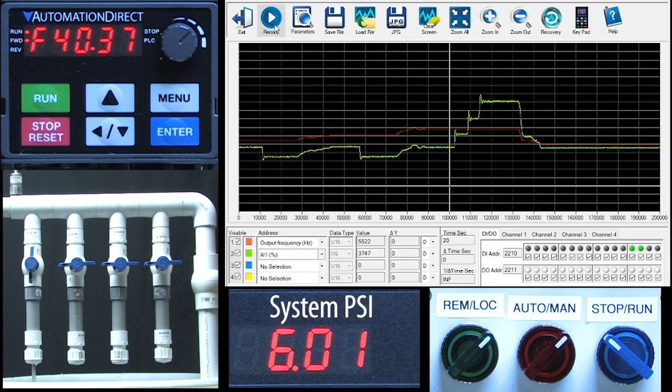In part 1, we saw that our system was capable of maintaining 6 psi regardless of how many valves we opened. All we had to do was keep adjusting the motor frequency to compensate for the pressure changes. In this video, we'll tell PID to do that for us. We put the PID setup in the remote configuration, so let's switch over to that mode.

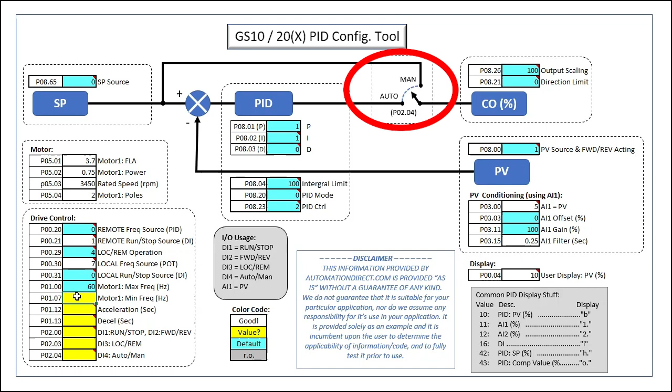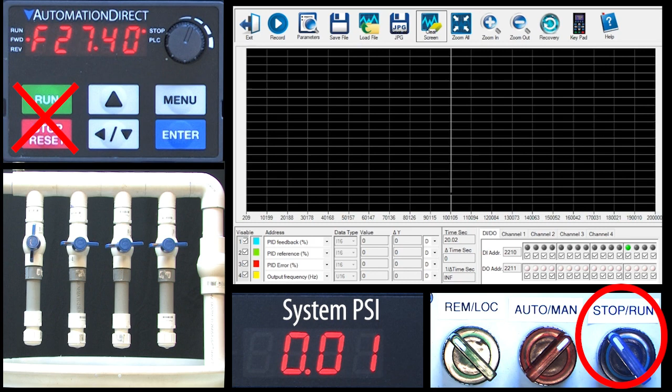Remember from our block diagram, when we're in PID mode, we can either manually control the drive's output, or we can have PID automatically control it for us. Let's start by manually controlling the motor's frequency. We set up remote mode's run-stop to be controlled by a switch, not the keypad like we did in local mode. So I'll flip that switch to run.

We set up the frequency in remote mode to be controlled by the keypad, not the potentiometer. So let's adjust that to get our system to 6 psi. And just like we saw in local mode, it takes about 40 Hz to do that. So everything we did in the previous video in local mode, we could have done using this manual bypass in remote mode, right? Well, yeah, and that's exactly what manual mode is for, so you can disable PID and test your system. Okay, but we want PID to automatically do that for us.

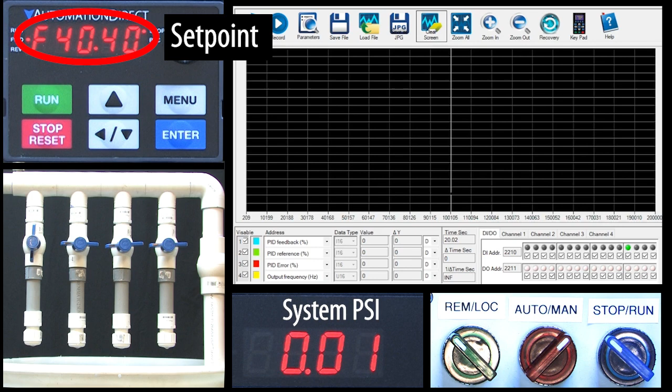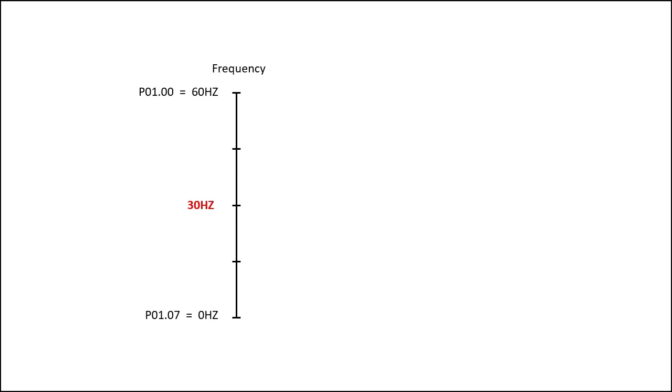But how do we tell PID we want to be at 6 psi? The GS20 understands frequency. It doesn't know anything about psi. Well, here's how that works. We told PID to use the frequency input as the set point. When we flip over to remote mode, PID no longer reads this as a frequency. It uses it as a percent scale. That is, it knows the frequency range we entered is 0 to 60 Hz, so if we enter 30 Hz, it reads that as 50% of full scale.

50% of our 15 psi sensor range is 7.5 psi, so in effect, PID interprets that 30 Hz as 7.5 psi. We want 6 psi, which is 40% of our 15 psi range. 40% of the 60 Hz frequency range is 24 Hz, so that's what we enter on the frequency scale to represent our 6 psi set point.

The GS20 does it this way because it keeps everything ubiquitous. It doesn't matter if you're measuring temperature or psi or what the full range is. You do everything exactly the same way because it's all in percent. Now you can see why I put 0 Hz in for the min frequency. If we had entered something else here, then it would be 40% of this range.

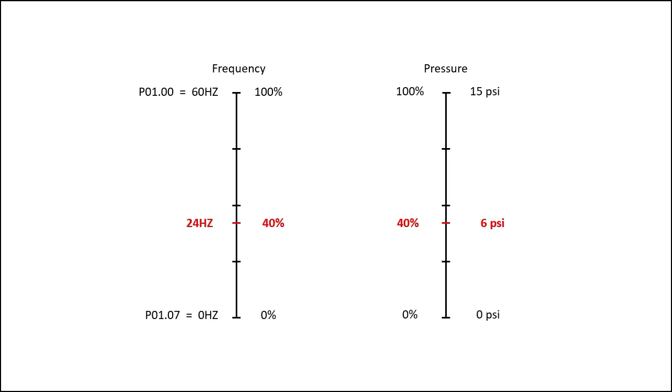Great. We're using the remote configuration, which is where we put PID. We want to automatically control the output frequency, and we specified a set point, which again is 40% of our frequency range, which tells PID to go to 40% of our sensor range, which for us would be 6 psi. I'll switch to run, and sure enough, PID automatically changes the motor frequency to get us to roughly 6 psi.

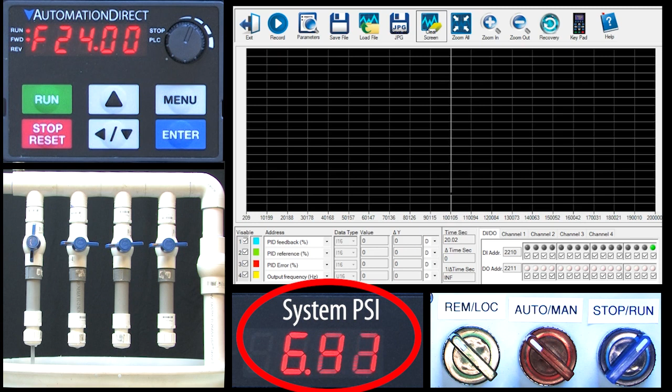Why aren't we exactly at 6 psi? Well, that's because our system isn't linear. The GS20 has a number of ways to correct for that, but for now, we'll just manually adjust our set point to whatever it needs to be to get the system pressure to 6 psi. It looks like it's around here.

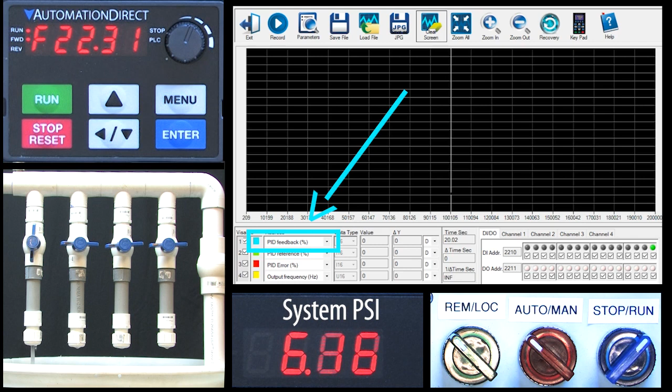I have this scope set up to show the process variable, or sensor value, in blue, the set point, where we want that process variable to be, in green, and the error signal in red. And we have the output frequency in yellow. Notice that everything's in percent except the actual output frequency, which is still in Hertz.

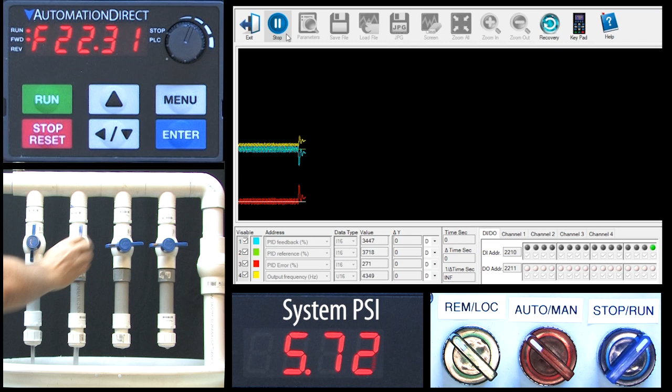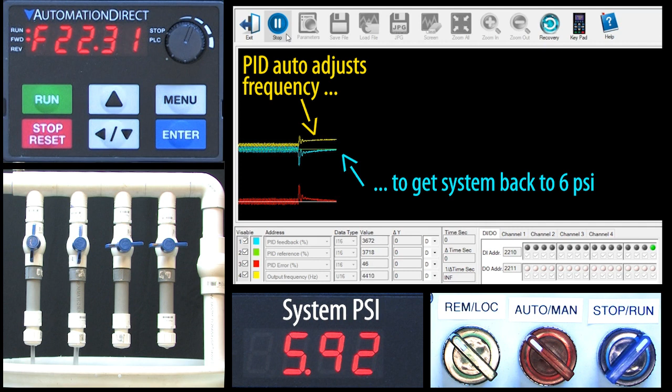I'll run the scope and open a valve, and look at that. The GS20 automatically adjusted the yellow drive frequency to get the blue system pressure back to the green 6 psi set point. I'll open another valve, and when the blue system pressure drops, PID sees that and automatically increases the motor frequency again to get that blue system pressure back to the green set point. Open the last valve, same thing. Perfect.

We can see the difference between the green set point and the blue process variable, which we call the error signal, down here in red. PID is always trying to get that difference, or error, to 0. It's doing a pretty good job.

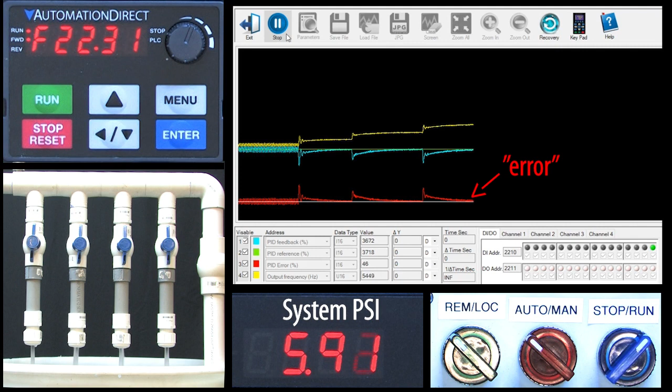What if I rapidly close 3 valves like we did in part 1? PID sees that and automatically lowers the frequency to get the system back to 6 psi. Exactly what we expect. Well, that's really cool, but it's taking around 5 seconds to do it. And while that's a lot faster and more accurate than when we did it manually ourselves in part 1, you have to wonder if PID can do better than that.

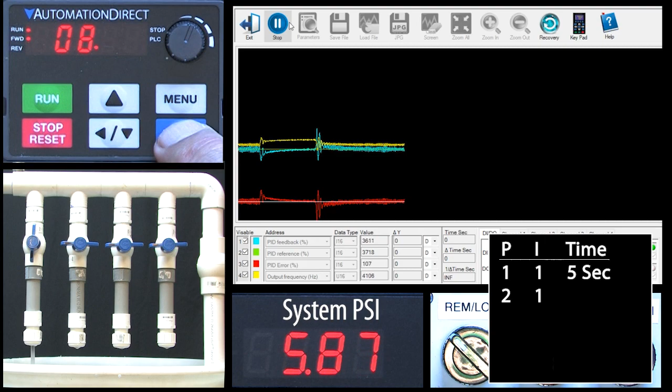I usually double P until things start to look unstable and then back off a notch. Let's try that. I'll start the scope, and I'll open a valve, and close it again just to get a baseline. Now let's go to parameter 8.01 and double P. Uh-oh, what's happening? Well, we've entered too much gain, and the noise in the system is causing things to oscillate. Let's change P back to 1.

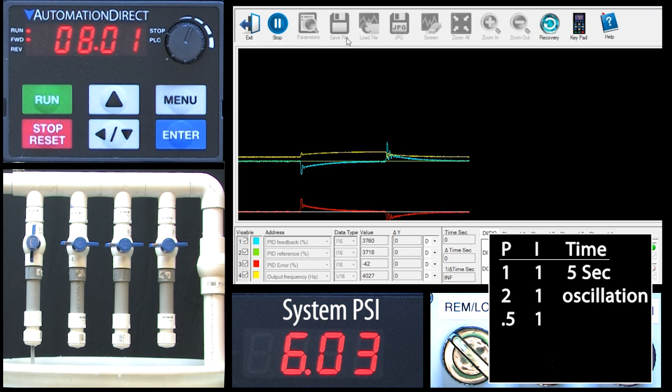That's better, but if I stop the scope and zoom in, we see the system really is still oscillating, which explains why this digital panel meter's display is jumping around so much. So let's cut P in half. That's looking better. The oscillations are about gone, and the digital panel meter reading is looking a lot more stable. But if I open and close a valve and stop the scope and measure that, the response time's gotten a lot longer because we reduced the gain.

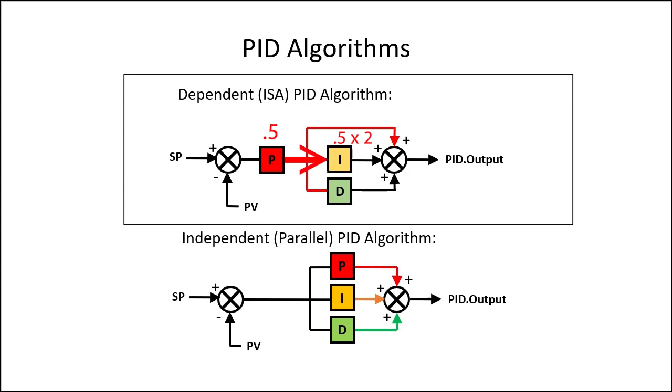And remember, that also reduced the I term because we're using the dependent version of the PID algorithm, where cutting P in half also cuts I in half. So we need to double the integral term to get it back to where it was to compensate for cutting P in half. Now this is key. Remember that in this implementation of PID, a smaller I term gives a larger response. So we really want to cut I in half to double the effect of the integral.

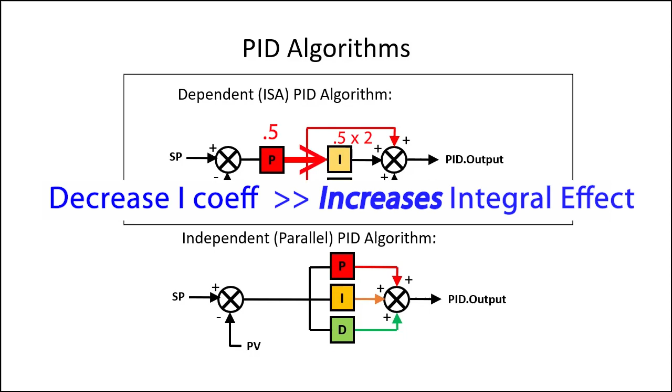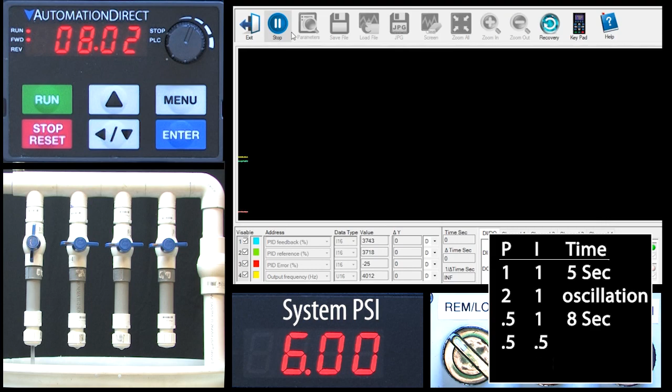So let's go to parameter 8.02 and reduce I to 0.5 to double the effect of the integral portion of the algorithm. Now if we start the scope and open and close a valve and stop the scope and measure that, it looks like we're recovering in just a couple seconds now.

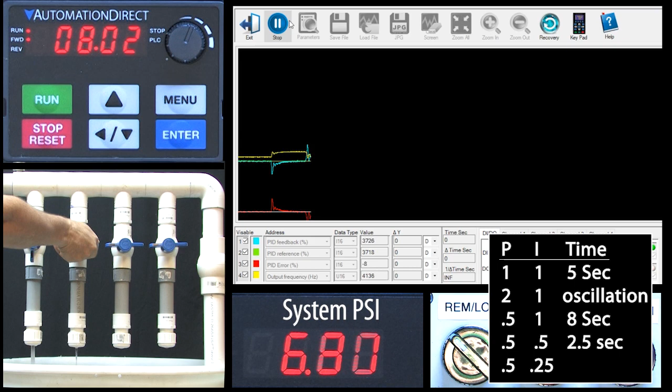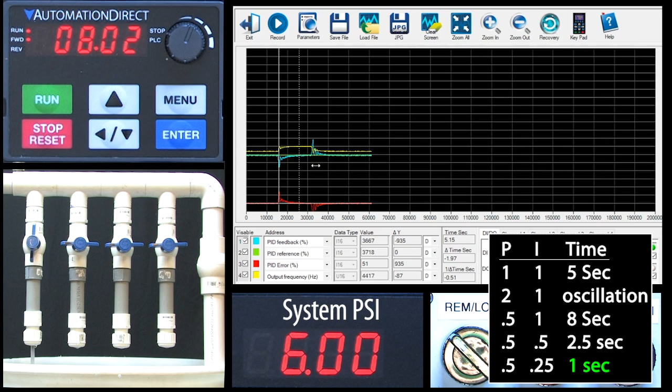So just for fun, let's double the integral again by cutting I in half again. I'll start the scope and open and close the valve. Holy cow. Looks like PID is recovering from the pressure drops in just a little over a second. That's great. The point here is you can fiddle with this as much as you want to get whatever system performance you need.

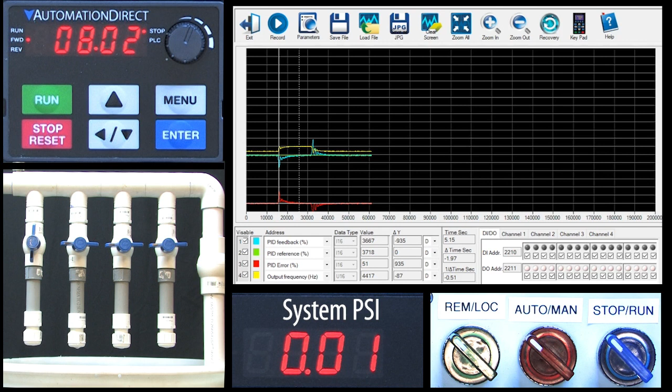We've only scratched the surface of PID in this video, and as you can see, there's a lot to keep track of. If you'd like to see more videos that dive deeper into set point options or process variable options, or how to linearize your process variable to get better results, or how to reduce system noise or any of this stuff,